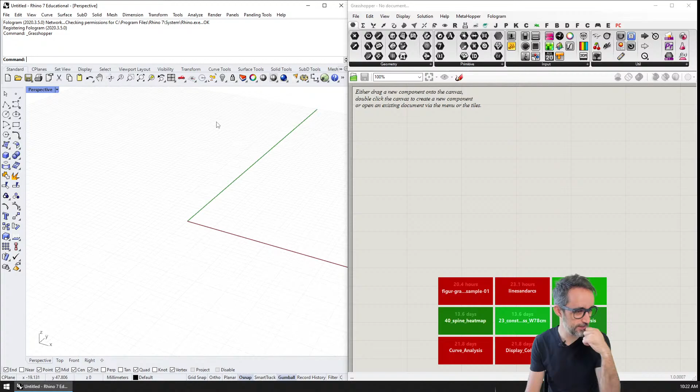Let me go back to my previous files. Let's open a little bit of Rhino here, let's open Rhino, let's open Grasshopper. By the way, who watched my previous video on Grasshopper 2? How are folks liking Grasshopper 2 so far? Feel free to drop comments in the chat window.

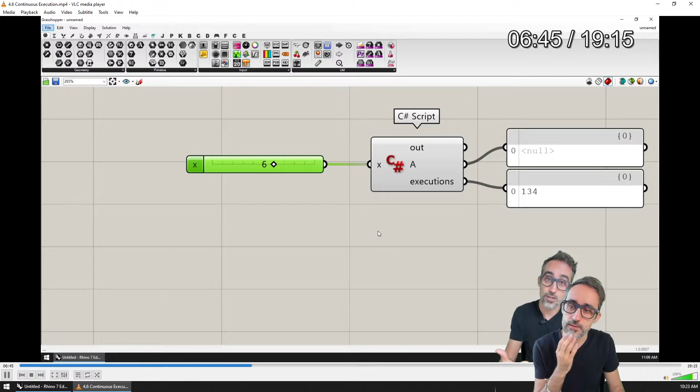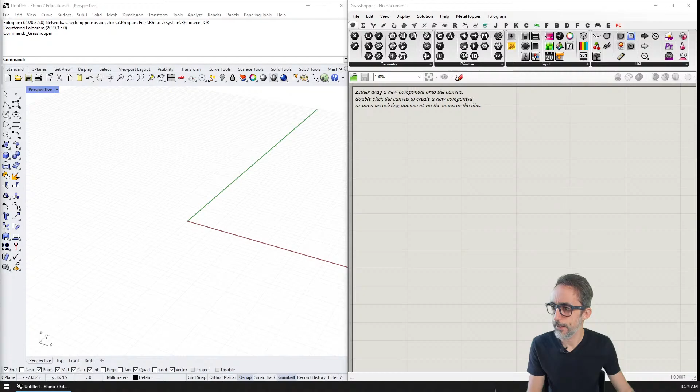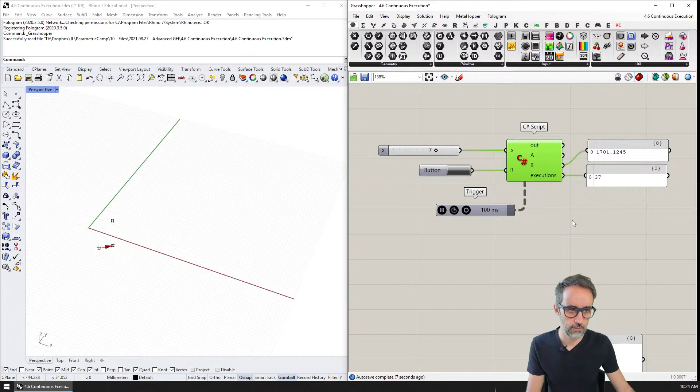Grasshopper is too cool, I think David's playing with us. Unfortunately, it felt a bit weird to watch a live stream that's not actually live. Well, time zones are complicated. It's fine, iterations double the value.

Okay, so that's one thing, and then the other one was just taking a location and a vector and just updating.

So I guess what we need to do then is start our ParametricCamp plugin. Which, by the way, how is the plugin going? Utilities, data, vector, construct.

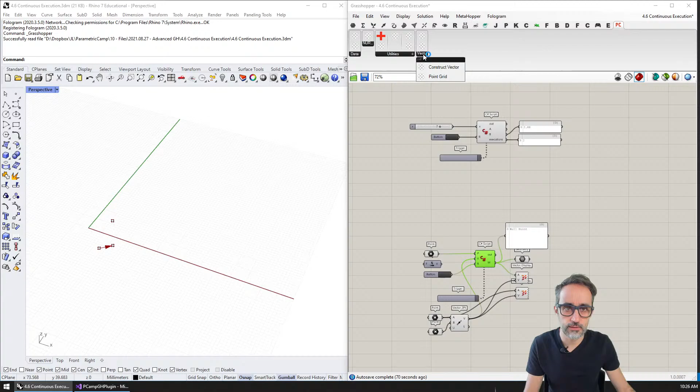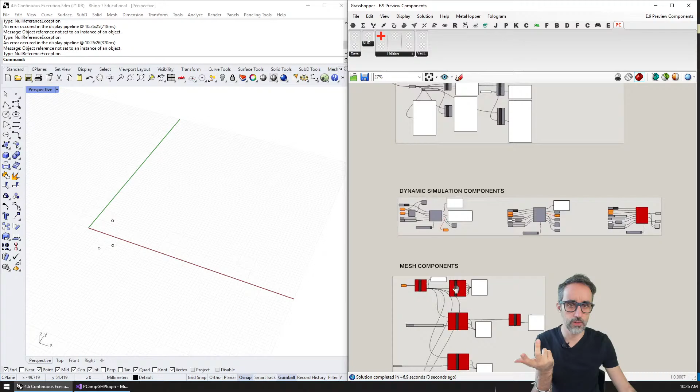So in the native components, preview components, I guess for the dynamic updates - oh yeah, because for the dynamic updates, document components, dynamic simulation, data components. So as an example, we did dynamic simulation components.

So I guess what I'm going to do is these are my notes for this, so I want to do this. I'm going to do an example where I implement the same thing, an iterator and the point that moves, in native Grasshopper. And then the next step will be implementing an auto update, so those components just changing automatically.

And then the exercise is that we will take this code, the simulation, and implement the dynamic simulation component there. That's what we're going to do today.

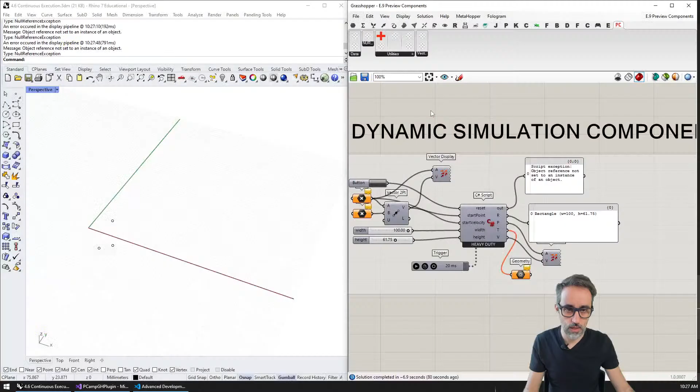So how are we going to do that? Well, I'm going to copy this code here so that I have it, so that I have my cheat sheet and know where I'm heading. If I don't think through what I'm going to talk about, then I start mumbling and it just doesn't work.

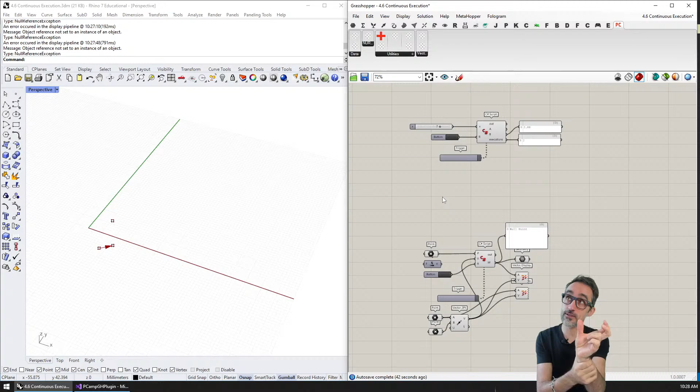Beautiful. So I think the video will start with an introduction, and I will record that later, which I need to remember. So I'm going to write myself here 'record intro' because I always forget. Record introduction, there you go.

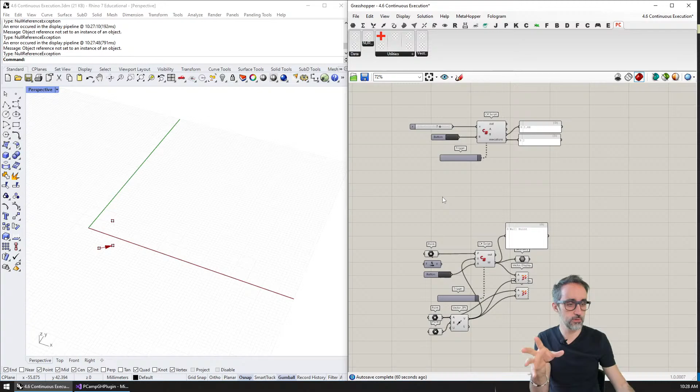And then I'm going to start. Okay, so what we did in the previous video - there will be a card popping up - is that we created a script where we had some code, but there was this area that was persistent data, and that stayed through the life of...

So what I want to do now is switch to a Visual Studio implementation where I already have the initial code for this. I only have to explain how to write the solver and how to write the persistent data.

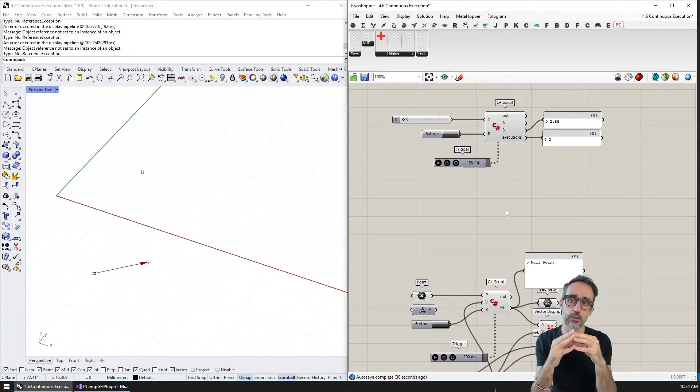I need a reset button. So: pManager.AddBooleanParameter 'reset', and then for the counter, the parameter access is going to be item, just a number count.

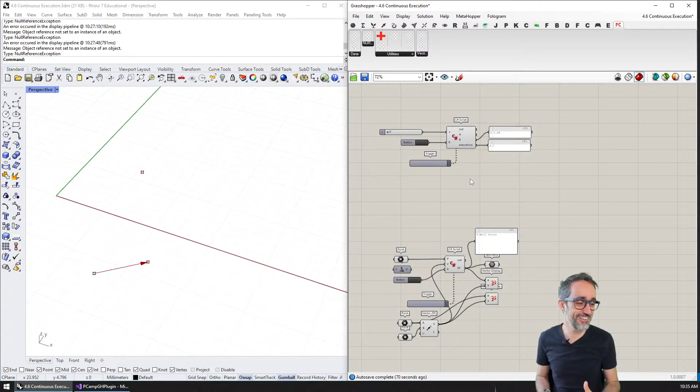Okay. All right, let's do this. Woohoo! I may have had a little bit too much coffee again. I don't even know how you folks deal with me in this state. I can barely deal with myself. All right, let's do this.

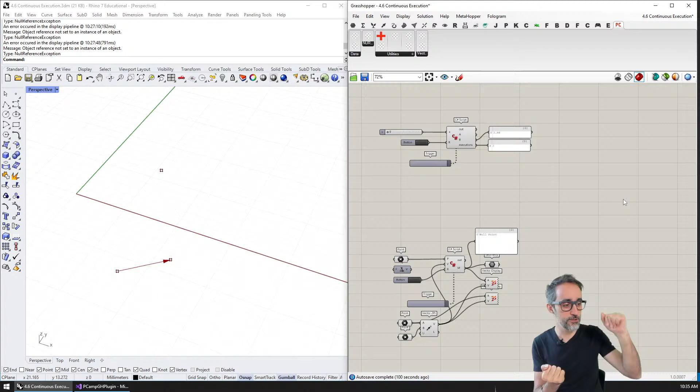Let's get started. If you remember in our previous video where we implemented permanent state using C# script components, which you can check via a card or a link in the description, we discussed that if we want data to be persistent across different iterations or updates of the component, there's a trick we need to do.

Instead of declaring or storing data in the main body of the function that executes whatever the component is doing, we need to add the variables that will contain that persistent data outside of that function. Because of the rules of scoping variables in computer programming, whatever you declare inside a function expires as data whenever that function finishes executing.

If you want to learn more about what scoping in functions means, we have a video about variable scoping that will pop up in a card, with a link in the description as well. So what we need to do is, because this at the end of the day is a class...

It's an object that gets instanced and has a particular function that executes when the component needs to update. If we declare variables outside of that function, we are declaring fields that belong to the class. Whenever that class gets instantiated as different objects - different components in this case - each component will have variables that belong specifically to it, not shared across components, and persistent across cycles of execution. That was the logic for C# script components.

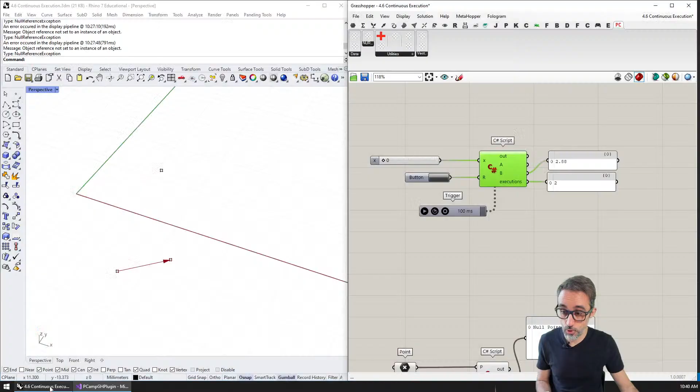So I'm going to close this, close everything, and trigger my Grasshopper plugin, and open Grasshopper automatically. It's loading some stuff, and the file already shows up. Okay, the main file that I'm using for debugging here.

If I now zoom out, on the PC I should have a new category that I've created called Development. I have this folder, this component called Counter, the one I just created. It has the ticker, it's just generic, and a Boolean which is the reset, which we will implement very soon. And this is the amount of updates that this component has taken.

So here, what I'm going to do is plug in a random input. And it looks like it's not working because parameter R didn't collect any data. So let me just plug in a Boolean toggle. Actually, this should be a Boolean button, which is not going to work right now.

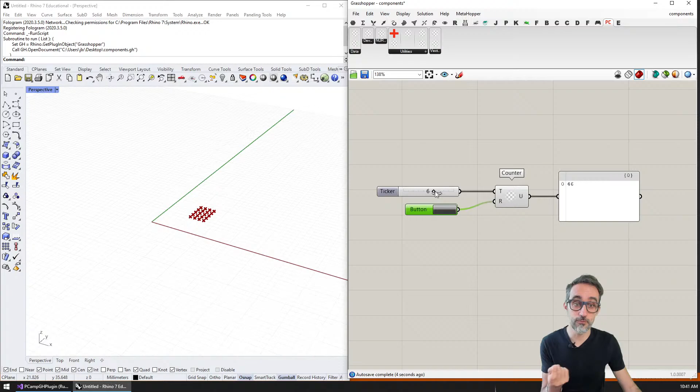But you can see that as I move my ticker, every time I move it, one new input data gets fed to the component that triggers an update, and the number of updates just goes up. So it's the same principle.

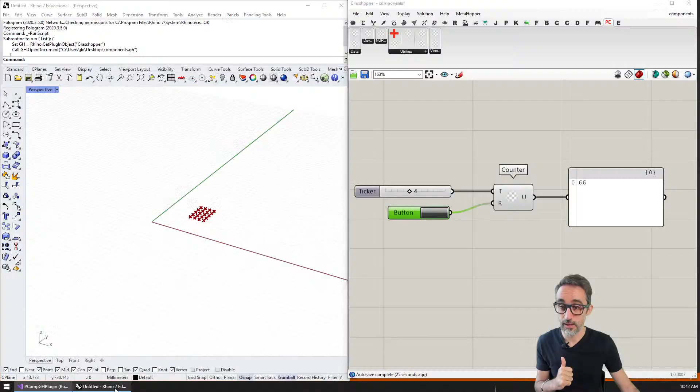Now the only thing I need to do here is make sure I use the reset value as well. So for example, let me first fetch that data. Boolean reset equals false. And then, if reset is true, then updates should be equal to 0.

Okay, I'm going to run this and see if it works. I'm going to drop the component because I forgot to save this. I'm going to drop the component again, drop a reset button, and place a panel here.

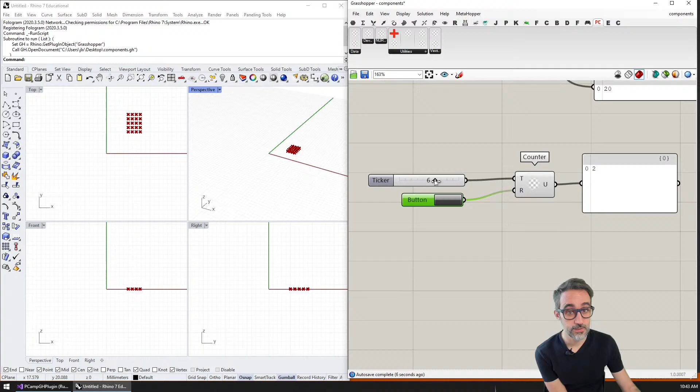So I got this, one, updates, all these updates, etc. And then I can reset this. Reset, and then updates. You may note that as I reset, I get the number 1, and I'm still pressing the button. When I let go, I get the number 2. That's because letting go, when it goes back to false, still triggers an update.

So maybe if you're annoyed by this, it's technically true. But if you're annoyed by this, what you can do is set this to -2, for example, so that when you let go, the count ends up at 0, if that's what you're interested in.

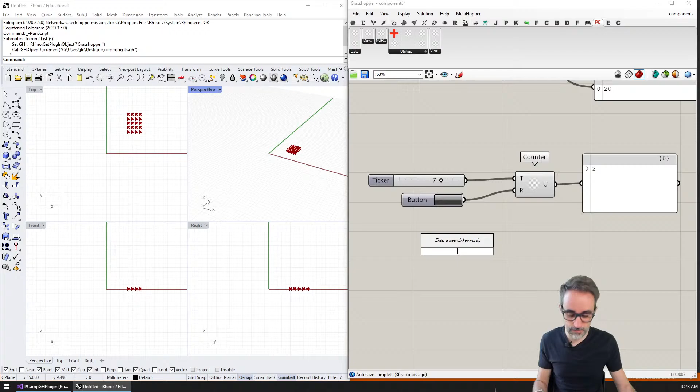And you can also, if you remember, use a trigger. So what I can do is connect the trigger here. I can set an interval, for example 100 milliseconds, and hit play. You can see how this trigger is basically ticking my component, updating it every 100 milliseconds.

Updating this count. So long story short, the only thing that changes when you want persistent data across updates, doing this natively in Visual Studio, is that you need to remember that the persistence fields are basically fields you add to the class representing that component. So you just add it as a field here. Nothing really different about this.

Now, one thing that's cool you can do if you do native development is that if you want for some reason to make these updates automatic, like in the previous exercise where we were doing physics simulations, and you're bothered by having to force this one component, the ticker, the trigger, to update externally, there's an option where you can actually write code to have the component update itself. So the component is the one triggering, ticking itself at regular intervals, which is quite cool. We're going to see that in the next video.

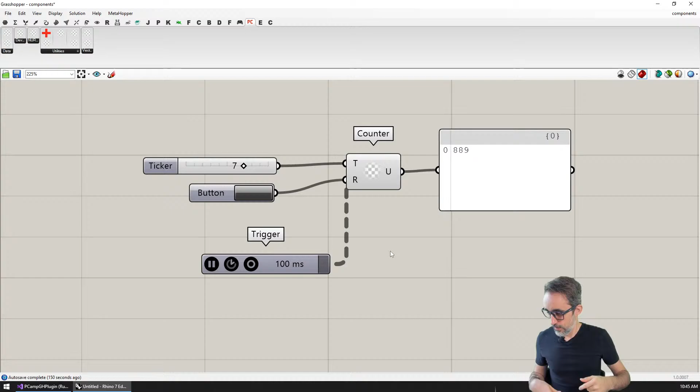Okay, and now I need to record the introduction. So let's do that. And the introduction is going to be what? It's going to be this, basically.

All right, let's do this.

Hello, this is Jose Luis here at Parametric Camp, and welcome to a new video in this series, Advanced Development in Grasshopper, where what I would like to teach you right now is how to implement in native Grasshopper the idea of having persistent data that stays... starting over again.

Hello, this is Jose Luis here at Parametric Camp, and welcome to a new video in this series, Advanced Development in Grasshopper, where I would like to teach you how to implement persistent data in native Grasshopper plugins. By persistent data, I mean data that stays there across different updates, multiple updates of a Grasshopper component.

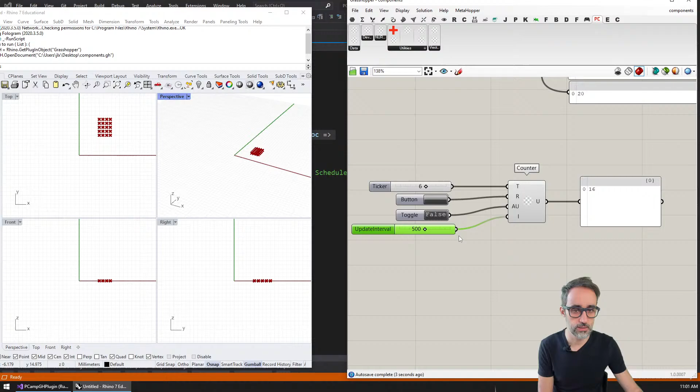Okay, so that's fine. And then if I turn this on, auto update, it's working. And then if I crank this down, then it updates much faster. So that works. I'm going to save this and close this.

And what if I now replace this with schedule a callback? I run this and see if the same thing works. And it is working. I reset, I stop the auto update, it starts. So it works well.

Nice. I like when things work well. It's nice. It's very nice.

So if that's the case, then the only thing we need to do is explain what I just did in the video. And I think we're actually pretty good on time.

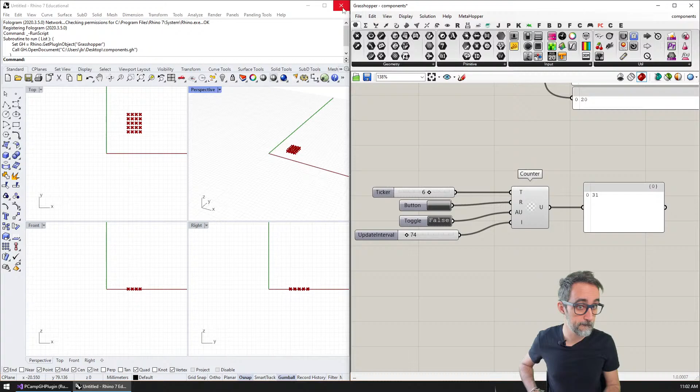So what we want is this then. So I'm going to remove this. I'm going to keep the inputs here.

And am I going to do an introduction? What am I going to do? Yeah, how am I going to do the video? Am I going to do an introduction? I think an introduction is nice.

So in the introduction, I can say, well, in the previous video, we saw how to update a variable, but it requires the ticker. So in this video, what I would like to show you is how to do it without...

You know what? We could actually do, how about we just copy and paste and get a second component so that we can compare them. Counter auto update. Yes.

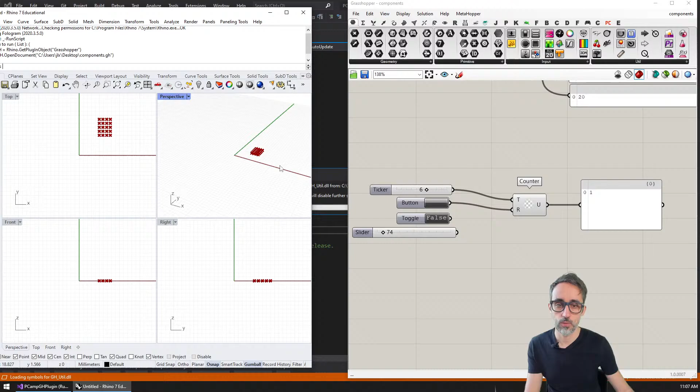Okay, all right, we got the counter. Okay.

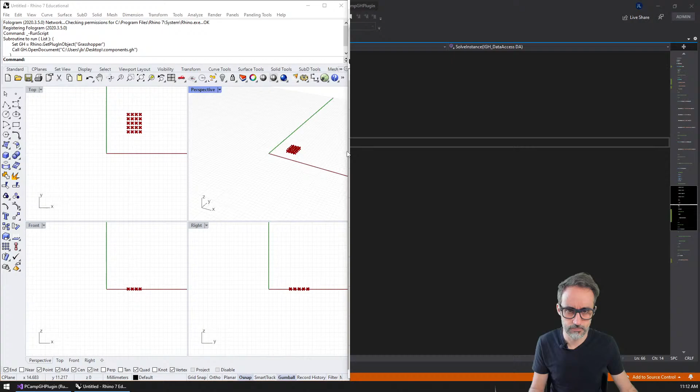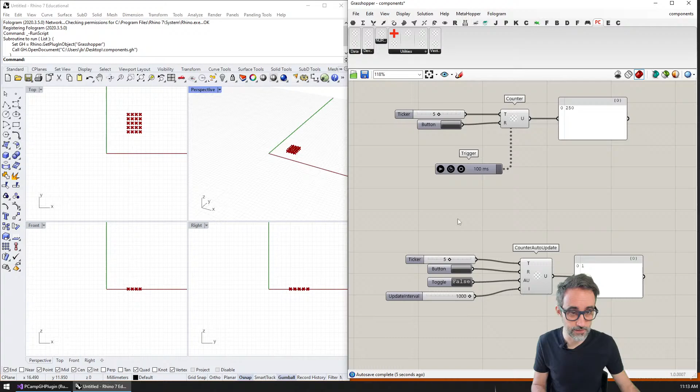So here I'm going to add a Boolean toggle for auto update and an interval. Oh, and this is updating too, because of this. True - yeah, it doesn't happen.

Okay, then I'm going to delete this. Am I going to delete this? Yes.

Now, something important to add here is that I can schedule a new solution in whatever milliseconds, but it turns out that if I do that out of the box, in the next solution Grasshopper doesn't see anything that has changed, so it won't flag this particular component to be triggered again. Since the inputs are the same, it sees no difference and continues without updating the component again.

So what we need to do is make sure that the solution is flagged as expired, which means we basically force the Grasshopper document to believe that the solution currently on is not valid anymore and that things need to be recomputed. And that's why we need to add a call to make that happen.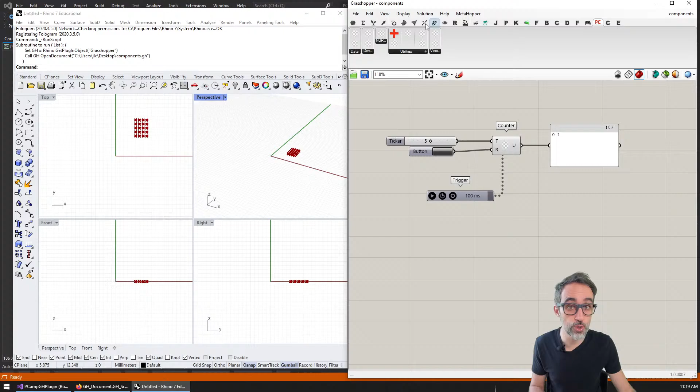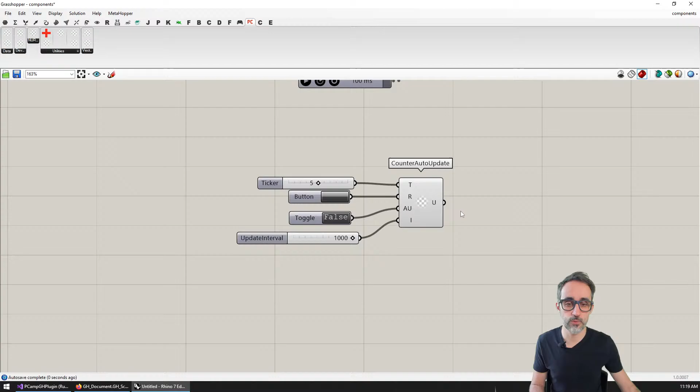And I have here this new one called counter auto update. So I'm going to copy and paste these here. I'm going to add a button, an input button, and create a Boolean toggle, so if I want to auto update yes or no, and how many milliseconds I want between updates, and I'm going to copy and paste this.

So this component is working just as we had before. And if I copy the trigger, you can see that the trigger will also trigger this component just as we did before. All right, now if I turn on the auto update, you can see that every 1 second, the component is ticking itself and it's refreshing.

And if I crank down the time, you can see that the update happens much faster. This is because the component is trapped in this loop: if auto update is on, it schedules a solution, then expires the solution, so it runs this code again, and because it runs again, it schedules a new solution, expires it, runs the code again, etc. It's like being trapped in an infinite loop where each iteration happens at every millisecond interval.

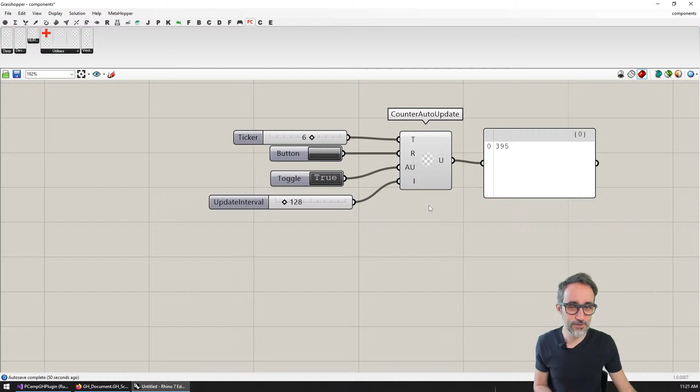It would be wise to write a sanity check where if milliseconds is less than 5 milliseconds, you stick to 5 milliseconds, because otherwise Grasshopper may actually explode. All right, beautiful. So we have this, it's working, it's auto updating.

The only thing I'd like to wrap this video with is I'm going to save this, close Rhino, and show you a very common way of writing callbacks. Callbacks can be declared as an independent function and then passed as an argument like this, but it's actually very common to write callbacks as anonymous functions. Sometimes these are called lambda functions—functions written inline that are not declared explicitly outside.

A very common way of doing this, instead of declaring it explicitly, is saying: I'm going to schedule a solution at this many millis, but then the function that's going to be executed after that, I write directly using the lambda notation. That means I can say the function I want you to execute is going to take something I call the document, and I use the arrow notation to signify that this is a function and that I need to execute whatever code is inside the brackets.

Then there I can just copy paste the exact same thing and expire the solution. This is identical to writing the function outside and then just passing the name of the function—it's just that we're doing it inline. Some people prefer this kind of notation, some don't. This is good if you're only going to use it once. If you're going to be reusing this delegate in many other parts of your code, it's probably good to just have it in one place.

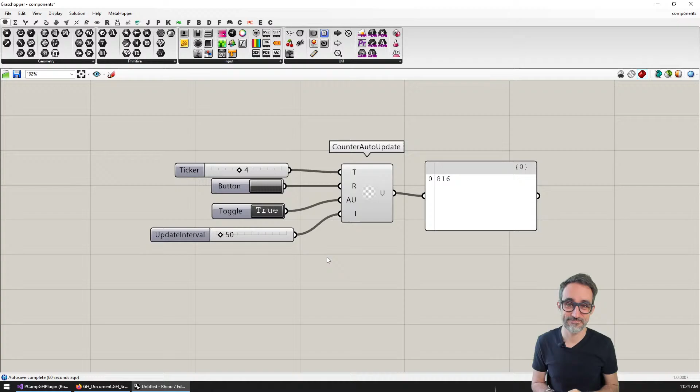Okay, and now the introduction. Okay.

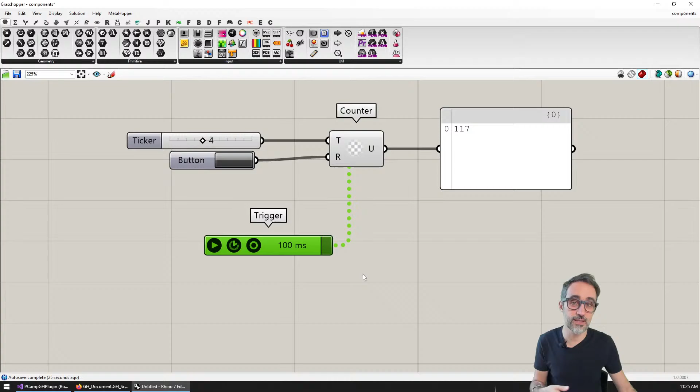Hello, this is Jose Luis here at Parametric Camp, welcome to another video in this series, Advanced Development in Grasshopper, where we continue what we did in the previous video, where we implemented a counter that could count how many times the component had been updated, triggered either by a ticker or by a trigger pinging the component over and over at regular intervals. So what I'd like to teach you in this exercise is how to implement the idea that the component may update automatically at regular intervals, but instead of using an external trigger, how to do it internally from within the component.

So I'd like to teach you how to implement an auto update so that if I turn this on, the component updates every 50 milliseconds, every 500 milliseconds, every 1000 milliseconds, or whatever you set it to. As soon as you turn this off, the component stops updating. It's actually very simple to do, and you'll find this very useful, especially if you're creating components that do dynamic simulation, relaxation, video games, even in Grasshopper, whatever you do. Okay, so let's take a look at how that would work.

All right, well, the chat got crazy. What's happening here? Roll camera.

What do you mean with event handling? Create your own events or using them? I agree, in any case it would be nice to cover both: learning about native Grasshopper events and creating new ones.

I kind of hate events so far. I used them a good bit in Unity, and they're super useful, but I find them awkward. I agree, I think the declaration in C# of events is a little awkward. I find it much cleaner in JavaScript. But you already know me, folks, I like JavaScript a lot, so I guess I'm biased.

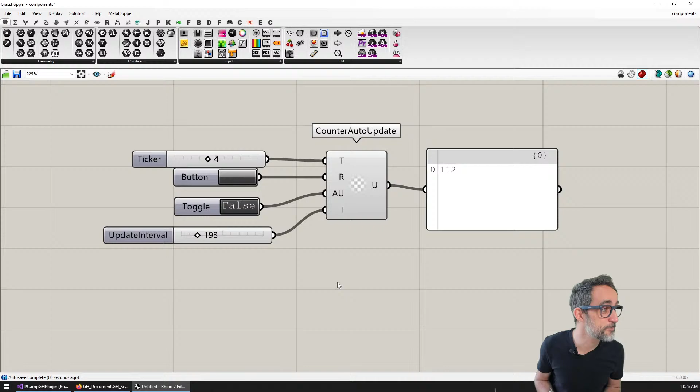Maybe with an explanation of it. Yeah, I don't know if I can make that any easier.

VR, Unity - I started making an aim trainer like KovaaK's. What is Kovacs? I learned so much with you folks. Kovacs.

Oh, videos, what is this? AIM trainer - ooh wait, is this something that I can play with? Is this in here? Can I play with this?

You know which game is awesome for VR and for this kind of training? Superhot. If you have ever played this game, it's extremely fun. It's beautifully, visually super exciting. Give it a try, okay?

Yeah, UIs are kind of boring, I have to say. If there's something I didn't find handy this time, it's getting the delta multiplier correct, independent from FPS. Exactly, Nicholas - using time deltas is very important when you do animations in VR or Unity. Oh, we should do Unity at some point here, right?

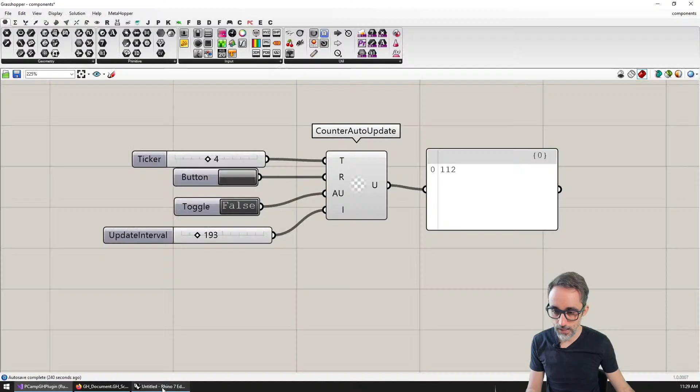All right, so let's do a simulation exercise now. Let's take what we had - I'm going to save this here. So this is good, I'm going to save this here.

Now I would like to - we're not doing Machina for Grasshopper, no, we're not doing that. Let me write myself a couple of reminders: part 2, C# example, another card on scoping, auto updates - I didn't say there was a card anywhere - and then auto updates and simulation.

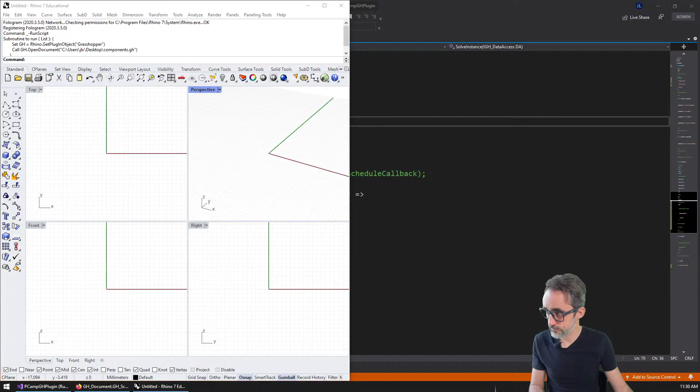So we're going to take the example that we did here, and preview components. Which one are we going to do? The cool one, right?

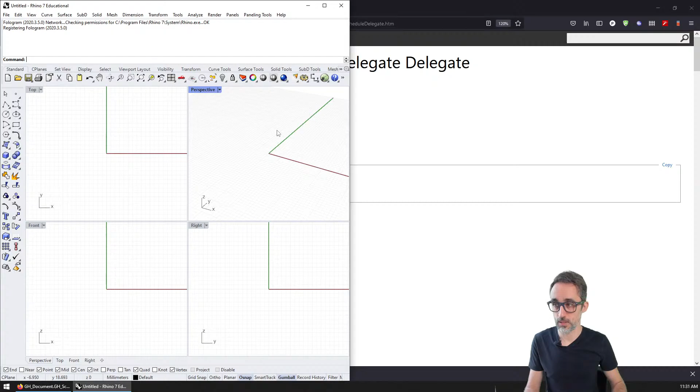Crash, crash, crash. Yes, I want to stop debugging. Okay, so crash. And here, preview components. And what do I have here? Oh, no, I need to move this a little farther down.

I'm very hungry - am I the only one who's hungry today? Oh, why is this taking so long? See you, Pedro, bye.

Oh, my hair is crazy today. Why is this? Oh boy, what have I done? Have I killed Rhino? Let's try again.

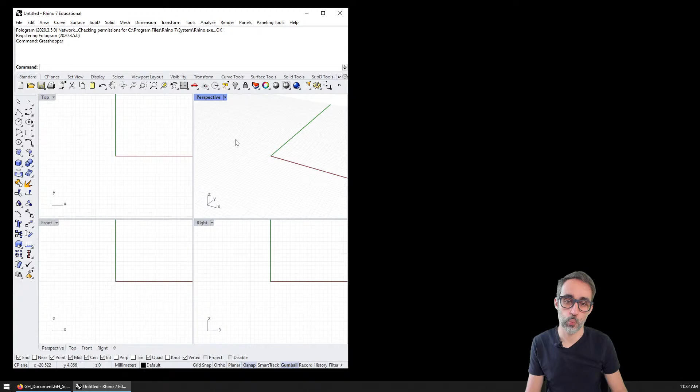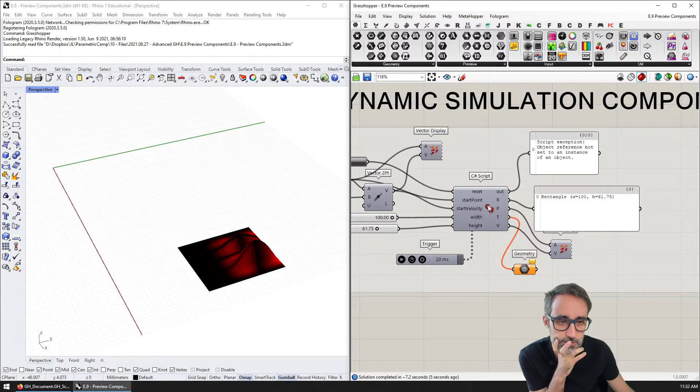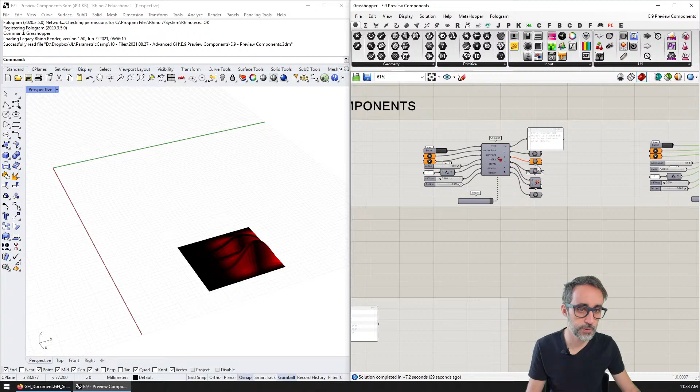Okay, let's open Grasshopper. I've got a preview here, we open the file, and I want to take a look at the simulations we did and see which one we implement. Those were here - dynamic simulation. What was this? Oh, this was the bouncing one. This was the rope. And what was this? Anchor. I don't remember what we did. This is 2 points, 2 points, 2 points. Okay, so let's just add 2 points and link them - set 1 point, set 1 point, and then... oh, I don't know, rectangle. Okay, yes.

Okay, so we had this one. All right, and I'm going to... okay, so that it was okay, but I want something a bit more exciting for the video. So this one and this one. I'm going to hide the mesh exercise. I'm going to hide this.

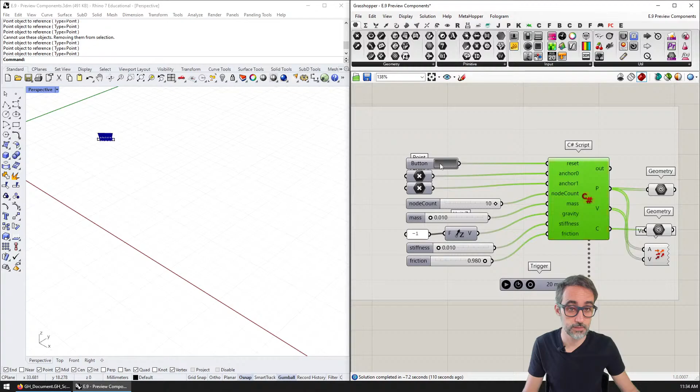So what did we have here? This was the pendulum, with the arrows here. And I'm going to stop here. And I think this was the one with the chain, right? I think this is probably the one that I want to replicate. And let's run this. There you go. Yeah, this is the cool one.

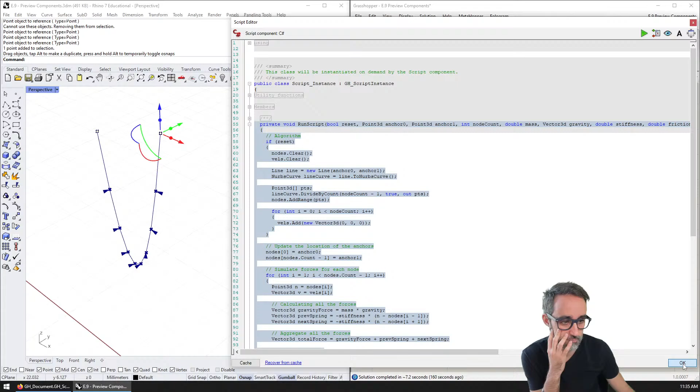And we want auto updates here. Okay, so I guess what this means is, okay, so I can probably start from the inputs already in place. Here.

Okay, so in the video, I'm going to have an introduction where I'm going to show. Actually, let me save this in its folder, native components.

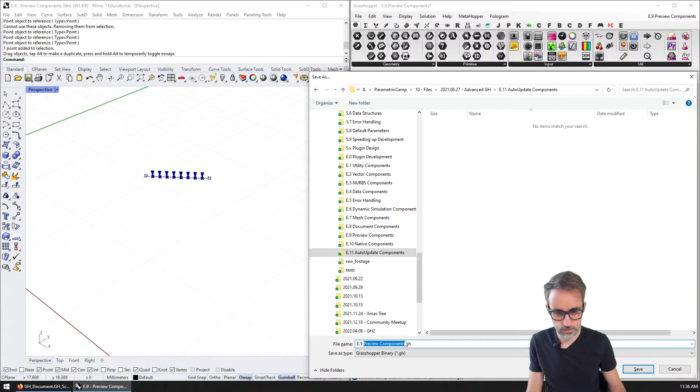What was this? Okay. So I'm going to create auto updates, simulation components, simulation components, auto update components. And so what I would do is, well, first I'm going to save this as here. I'm going to call this E11 auto update components.

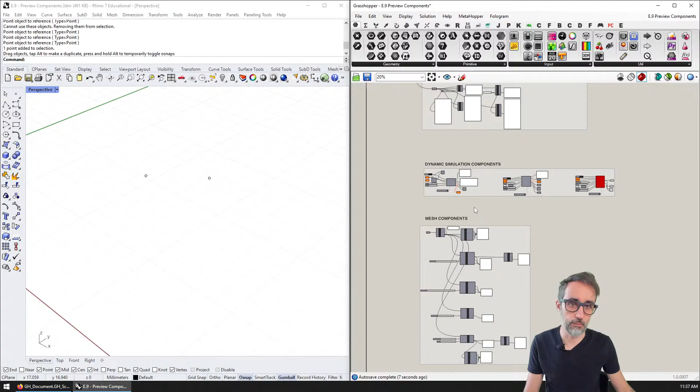I know, but I'm not doing it here. You're right. No, this is not the file. Yeah, I don't need this. Sorry. Okay. Oh boy. Fine. Okay. Fine. So here, sorry, I'm a little messy right now. So I do this in the other file because that's the one. I do it in the Grasshopper in the native project.

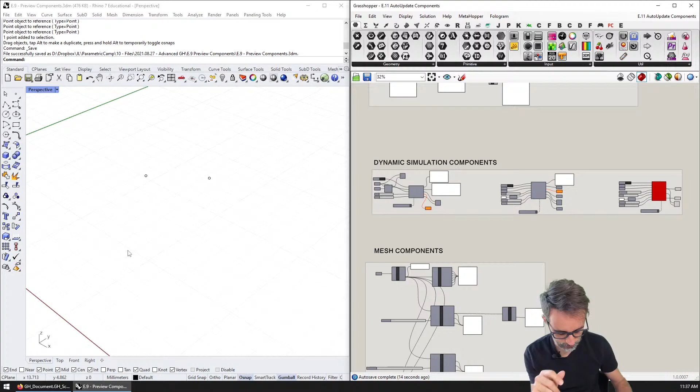Okay, so I'm going to start. The introduction video, I will show how to create a simulation and do the auto update. And then what I want to do is I want to start the video by saying, okay, if you remember, we did a bunch of simulation components, the one that did the bouncing, the one that did the pendulum, but we also did this one that was a sagging chain, all right? So, but this one relied on the trigger, blah, blah, blah. So what I would like to do is implement the exact same thing, but with the auto update.

So what I'm going to do is, first of all, and then I will switch, I will have the file ready with all the inputs, and I will get onto the code. And I may actually want to have a side-by-side Visual Studio versus the code in the component, so that I can just copy and paste, basically. Okay, all right, so let's do that. So this is going to be the intro to the video. The not the intro, the after the intro.

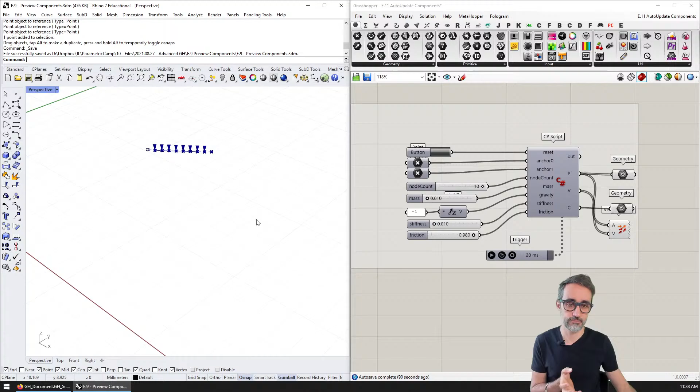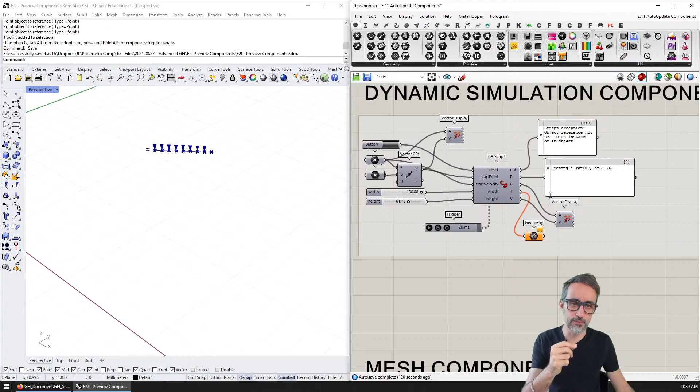If you remember from the exercises that we did when we were looking at C# scripting within Grasshopper, you remember that we did 3 examples for dynamic simulation. One that was this point that is bouncing off the borders of a rectangle, or this pendulum that is kind of bouncing with an elastic or a springy rope connected to it. And the third one, which was modeling the sagging of an elastic chain that looks something like this.

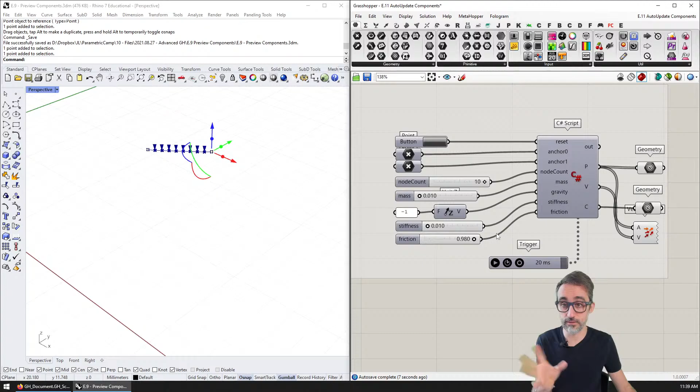So I can turn it on, I can update. Sorry, I have 2 nodes that are connecting the line. I have a bunch of options such as how many subdivisions I want in between them, the mass of the elements, where the gravity is pointing, the stiffness, etc., etc.

And then I could turn on this trigger to have the simulation update over time. And I could even interact with the simulation and move the objects and things would automatically update. And I had these arrows, these vectors pointing at where the velocity of each one of the nodes is at any given point, correct?

So what I would like to do is I would like to show you how to port this example, but instead of, which looks something like this, is basically if you reset, just turn everything back to standard, and otherwise just do like a very simple physics simulation, calculate gravity, the spring forces, and add them all together, and keeping the global state of what's going on in the simulation as a list of nodes, those are the particles, and a list of velocities, which is how those particles are changing every iteration, every frame. So this is going to be useful for us to relearn what we saw in the previous videos, which is how to do persistent data in native Grasshopper development.

But at the same time, I would also like to improve this example by not relying on the trigger anymore, but implementing the possibility of having automatic updates, and having the component be the one who controls how it updates itself. Okay? So what I'm going to do is I'm going to prepare the component offline and let me show you what that looks like.

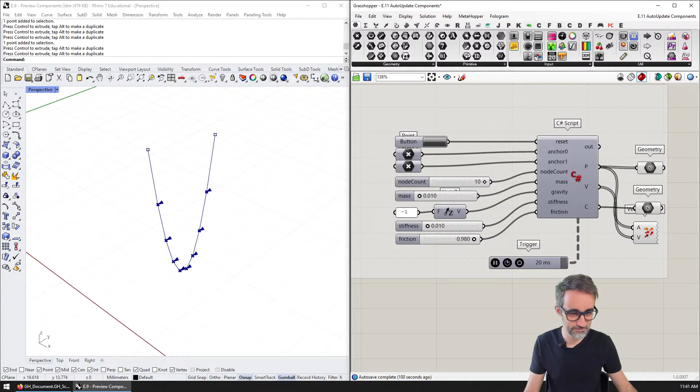All right, so I think I can close this. I can close this because I do have the code somewhere here. Yes, and I am going to open my Visual Studio project. I'm going to leave this here, actually. Why not? I'm going to leave that there. Okay, and then, oh, I closed the Explorer. How do I bring up the Explorer again?

Oh, I always forget that. Solution Explorer here. Okay, so, and view properties. Where are the properties? Properties window. No, here. Properties window. There you go. Okay, how are we doing, folks?

I think this one is going to be fairly quick because we're not going to really dive too deep. And I'm going to add a new folder. It's going to be called simulation. And in simulation, I'm going to create a new item, which is going to be, what are we calling this? Elastic chain, for example. And I'm going to drop this here, elastic chain.

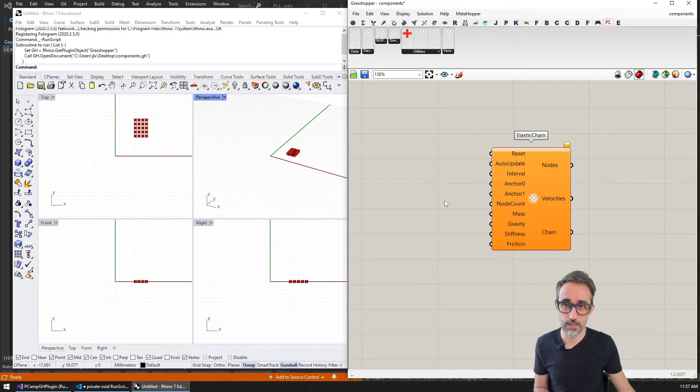So the next thing we have to do is simple. First, I'm going to take the exact same code that I prototyped and copy it into the solver, except for the part where I did the outputs, because outputs in native Grasshopper are treated slightly different. So I'll take the whole code and paste it here. And you can see that something is not working right now.

I'm getting an error that I don't have a variable called nodes or velocities. If you remember, that's because the nodes and velocities are data that is permanent across different updates of the component, since they need to change over time. We talked about this before, and in the C# implementation they were declared outside the main solver function, as a separate entity.

So what I can do is copy this and declare them in the parent scope as well. I'll go all the way to the beginning and declare persistent variables, initialized to empty lists. Now the whole code should actually work.

So now if I run this code, I'm going to save it and run it. Things should actually work. I don't have any errors. Let me take a second to plug in all the data here.

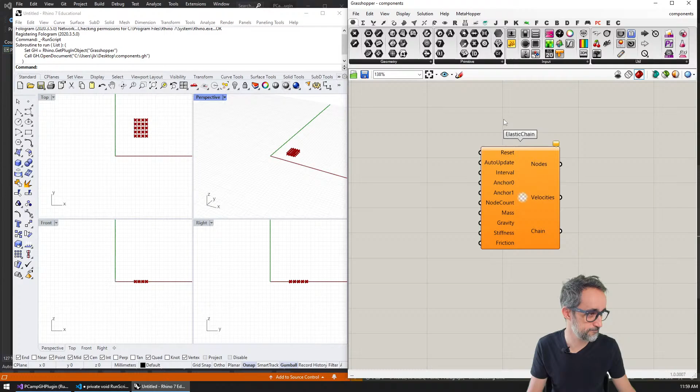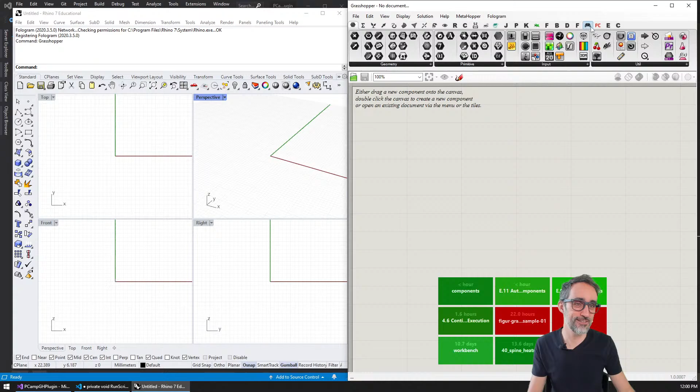Components, no recovery file, I don't need this. I also want to open... I just don't want to do this manually, I just want to copy paste. Please, please, please let me copy paste.

I'm going to copy and paste this here. So I have the reset button, I have a toggle—no, toggle gate, no, Boolean toggle, yes.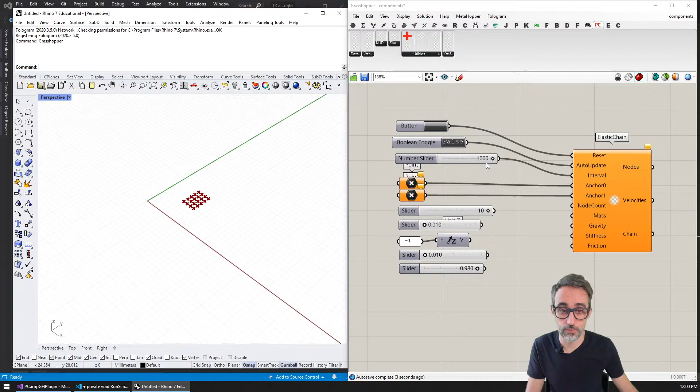The milliseconds, here, here, here. I'm going to have two points. Can I turn this off? Where is this, can I turn that off? Yes. Can I drop a couple points here? Set one point, set one point. I'm going to save this as components here.

Okay, and then node count, mass, gravity, stiffness. And actually, gravity should probably have a slider.

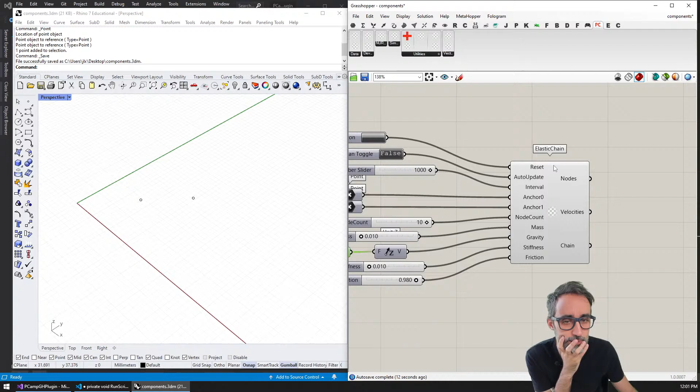There you go, index was out of range, must be non-negative. Parameter name index, I don't know what happened with that. Oh yeah, I need to reset. And let me...

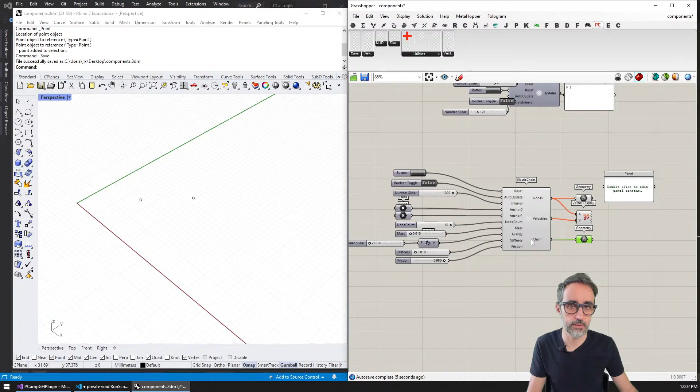Velocities here. Right, and I'm going to also have here the outputs. DA set data, that's going to be nodes. Set data list. DA set data list 1, velocities.

DA set data two, it's a new polyline with nodes. Okay.

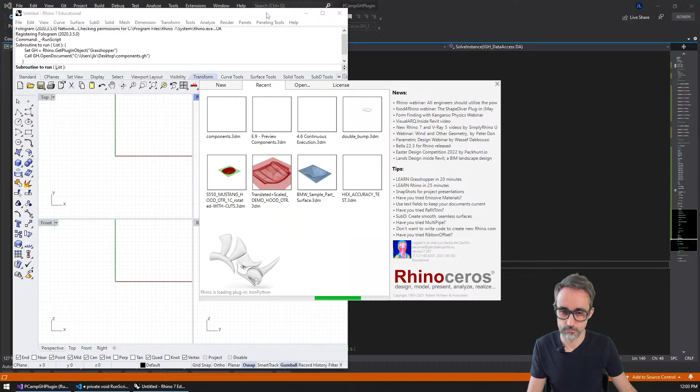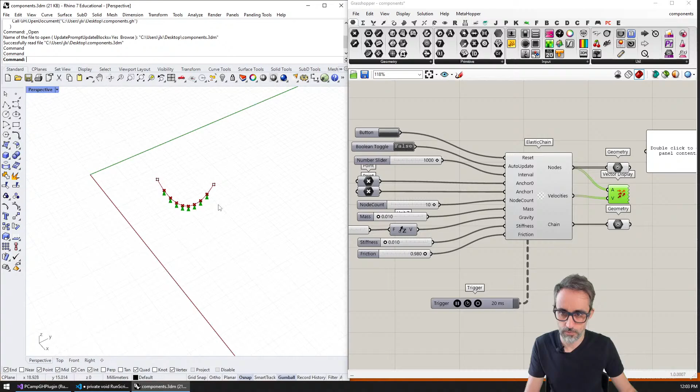And then a trigger here. And there you go, very nice. Okay, very nice, I like it.

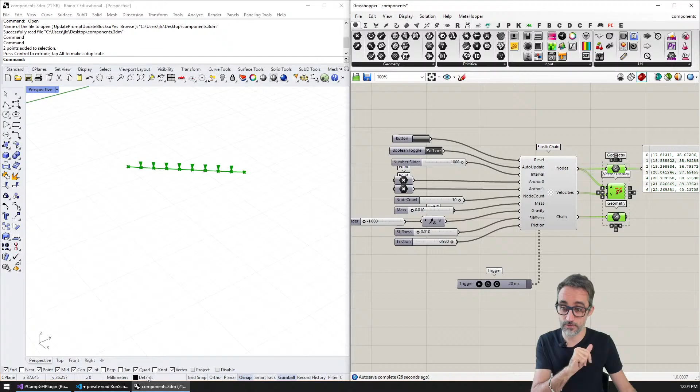Okay, I have added all the proper inputs, all the sliders, the Boolean values. I have added the outputs and the visualization of the vectors. And I also added, which I forgot, the outputs to the set—making sure that the nodes were output as a data list, the velocities as a data list, and a new polyline created on the fly with the nodes as part of the third output.

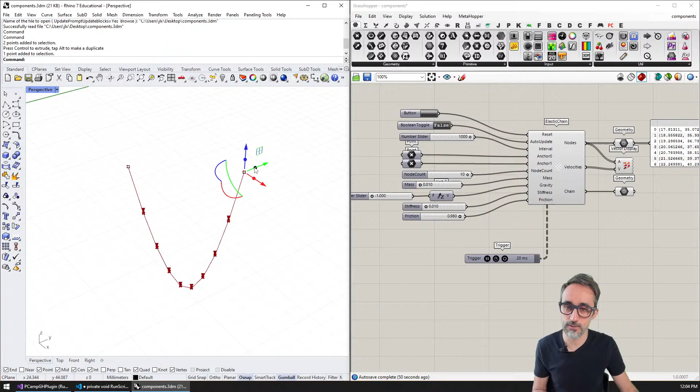So now you can see that I have my simulation that I can reset. I can turn the trigger on, the simulation will execute, and I have the exact same behavior. I think I can interact with the simulation, etc. I can see the velocity vectors, same as before. So it was just as simple as copy pasting with the exact same names.

The only thing we don't have is that if I stop the trigger and turn on auto update, it doesn't automatically update because I haven't implemented that yet. It's going to be super easy, as we saw in the previous video. So let's take a look at that—let's go back here.

We're going to save the file and spit out the outputs, but then I'm going to schedule a new solution. The solution is going to be scheduled the following way, which we've seen in the previous video.

What we're going to do is say: if auto update was on, that input from the second input, if auto update is on, I would like to first retrieve the current document and schedule a solution at a particular interval, which is however many milliseconds were given to me as part of the input.

Then, as we saw in the previous video, I need to add a callback, a function that needs to be executed whenever that solution is scheduled after however many milliseconds. So I'm going to write a lambda function, an inline function, that's going to take the current document, because that's part of the signature of the delegate we saw in the previous video. Then I'm going to make sure the solution is expired.

So I have my two points here, I reset my simulation, and then I'm going to turn auto update on. I thought it wasn't working - it's just very slow because it's at 1000 milliseconds.

So let me set this to 20 milliseconds. I thought it wasn't working, I was like, what the hell? Let me reset this, and the same thing.

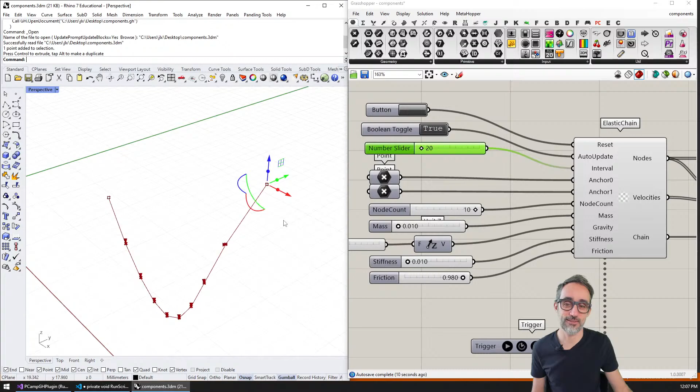But now it's much more elegant because the update - this is unnecessary anymore. The update is happening from within the component, which is kind of great.

So in the C# script prototypes, we have two other dynamic simulations, but I'm not going to do those here. I'm just going to do those at the very end of this series as an exercise, but I hope this was useful for you to understand how to create components to do dynamic simulation and have them update themselves.

Then with that, I think I'm good for this video, and let's move on to learning more things in this series about how we can do advanced development and cool things developing native plugins for Grasshopper.

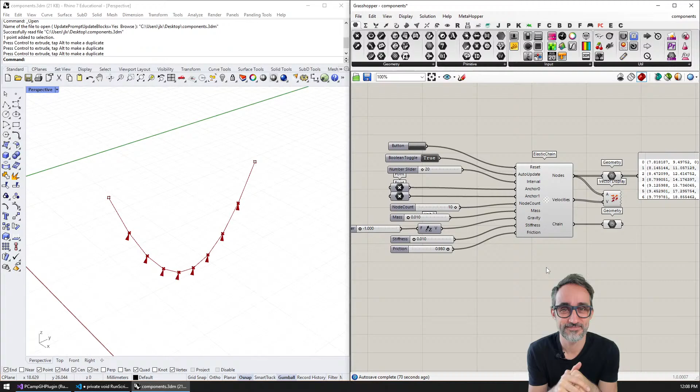Okay, am I the only one who's tired here today? Whew, that was a lot. I mean, I'm complaining, but you folks sat through this whole thing as well. I don't know if I would do that for myself.

Okay, so this is good. The files are good, I think we're good for today. And we're kind of on time, especially because we started a little later, so it's noon. Okay, any other questions, comments?

So what is next on the list? We have to do custom previews, so we need to do some of that. How is that handled? I think it's slightly different than with C# scripting - I forget, so I need to look into that.

Then we're going to do version management. That's very cool - so when you make a version of a component and then you deprecate that component so that it doesn't exist anymore, that's a very good thing to learn.

Then external libraries, so how to load external stuff, and we're going to replicate some of the examples that we did for C# scripting, I guess. Custom data types, shared data between components - I guess all of that we can do as well. It's on the list, so we're actually very close to finishing.